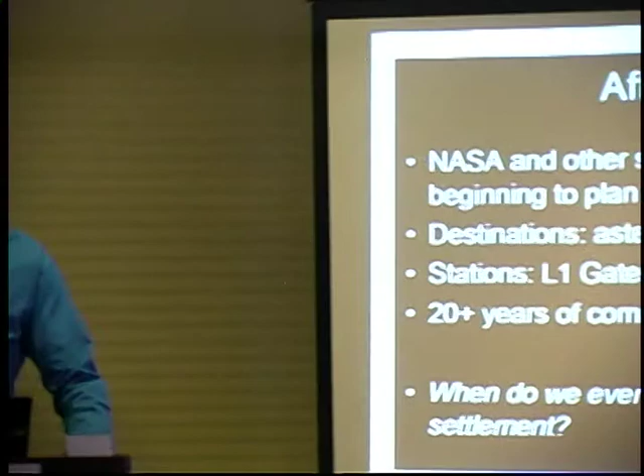I'm John Cserep, here to present a concept for a near-term colony demonstrator, as I call it. NASA's getting to the point where it's starting to think about what to do after ISS, and a number of ideas have been floated. They are still kind of groping for ideas, not sure where they want to go next in terms of destinations. They are talking about putting some kind of station at L1, such as one sometimes called a gateway. Whatever they commit to, it's likely that they're going to be doing it for a long time to come. And at some point, we've been asking, when do we ever get our turn to get some progress towards our goals of making a spacefaring civilization?

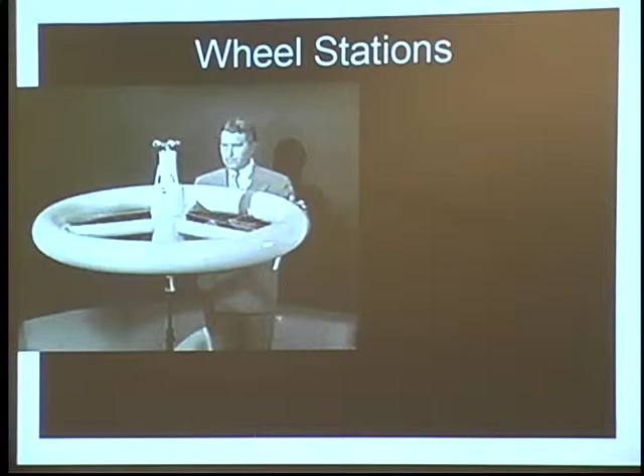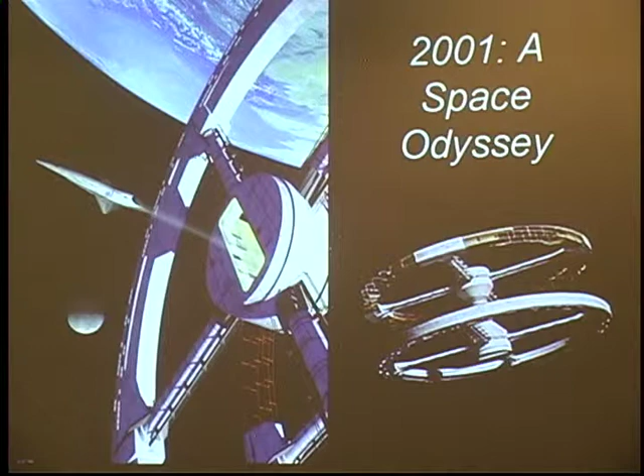An idea from the 50s and 60s is something I'd like to talk to you about today. The idea of a wheel-type station which generates its own gravity by centrifugal force was pretty popular for a time, and fell by the wayside in the 50s and 60s, mostly for, I'd say, relatively valid reasons, but I'm going to propose resurrecting this idea. I think the time has come to come back to this and make such a station, but for completely different reasons than were originally envisioned in the 50s and 60s.

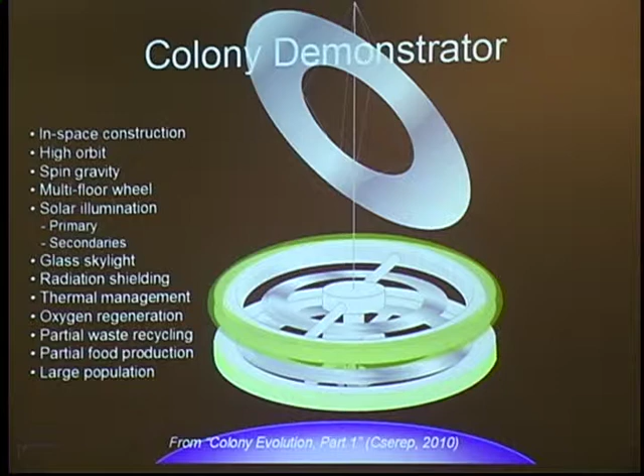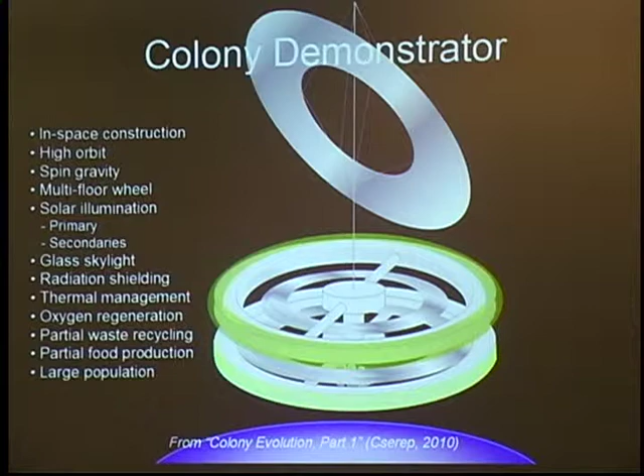So in a previous talk to ISDC, I identified the need for what I call a colony demonstrator, which would be a LEO station of reasonable size, but which would include the key features of a full-sized colony. And since then, I've been thinking about the even harder problem of how to actually get such a thing paid for. Even at this scale, it would be quite expensive, and none of us have any money to spend on such things, so how to get it built has been what I've been looking at since then, and it's become a very, very interesting exercise that resulted in what you're going to see today.

So my way of looking at this is that if we want to get some kind of demonstrator built, it has to appeal to the people who have the money but who may not actually care about our goals. So the solution, as I see it, is to make a station that serves as many customers as possible while still meeting our needs for advancing the key technologies. So, based on things I've heard at these conferences over the years, I identified 4 key groups of people who might have money that could be leveraged for this purpose.

And they are in order: those interested in propellant depots, which you've heard about at this conference. There's a growing interest in putting these, which are basically rocket fuel gas stations, out in orbit or out near the moon to act as enablers for a wide variety of other missions. Usually these are conceived as strictly single-purpose facilities, but I'm going to propose that they be thought of as more like just the nucleus of what could grow to become a much larger and substantial facility, as I'll show you.

Second group, those interested in space hotels. You're aware there are a number of companies working now to bring paying passengers into space. They all intend eventually to take passengers into orbit, or they want to have a destination to take them to. Right now they have some very notional idea about what such a hotel might be like. I'm going to suggest that what they think they need is not what they really need, and what they actually need is something a lot more like what we need, as I will explain.

Third group are those interested in going back to the moon in any serious way, especially if it involves people. They could benefit greatly from what I'm just broadly calling risk reduction, which is a deliberately broad term covering both people and their equipment, and it would also involve a great amount of cost reduction, as I'll show. And the fourth group would be those interested in going to Mars, who would benefit in all the same ways for the same reasons. And of course there's some overlap between these two groups, but maybe not as much as most people would guess. The bad news is, of all the people interested in spending money on any of these things, none of them is the least bit interested in the kind of station I'm going to propose.

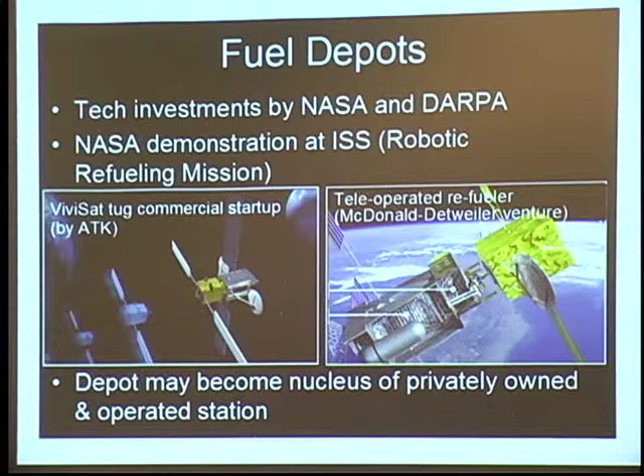And this raises the very intriguing possibility that any space station built around such a depot would be a commercially run outfit, meaning that agencies such as NASA would be simply tenants who would just lease space aboard the station as needed.

Okay, space hotels. So these companies are wanting to take people to space. When all this activity began over a decade ago, there was some very vague discussion of what space hotels might be like. If you ask them today, they would probably say that they intend for it to be something like a number of Bigelow inflatable modules connected together in a zero-G station, which would seem to meet the two key things that their customer is going to want from a space visit. One is to enjoy weightlessness, the other for Earth gazing.

However, I think they're overlooking the fact that you need gravity to be provided for at least 2 major reasons. One is using the toilet. And if you know anything about how astronauts deal with that in zero-G, you know there's really nothing good about it. And it's one thing to ask a NASA employee to put up with that kind of thing, but for guests paying a whole lot of money for a space vacation, no. Not only no, but hell no. I'm just going to leave it at that.

The other main thing you need gravity for is eating. And of course, you can eat without gravity. I'm sure we've all seen videos of astronauts floating around, eating M&Ms and little blobs of water in midair aboard stations, but only up to a limited point is that going to be acceptable. When people are spending that much money, spending several days in space, that's a lot of meals to be served, a lot of food floating around, sticking to walls, getting into things. That's really not going to be acceptable.

But this seems to present the space hotel designer with a dilemma. How do you provide both gravity and no gravity in the same facility? But we've already seen the answer, because we all know that a wheel type station has a hub, and the hub is an opportunity to provide a zero-G environment. So in principle, at least, you can sort of have your cake and eat it too, and I'll try to show you how we might do that.

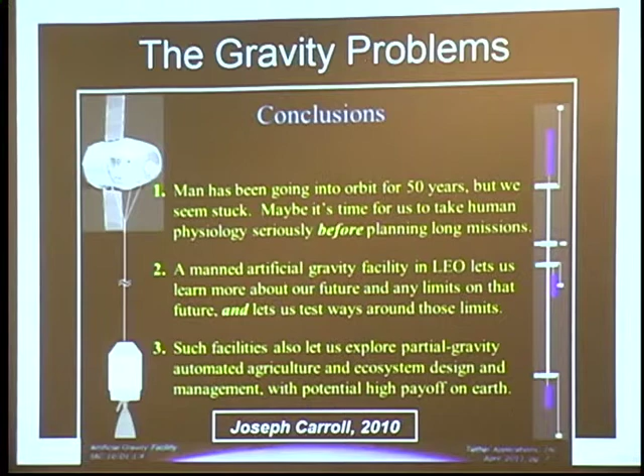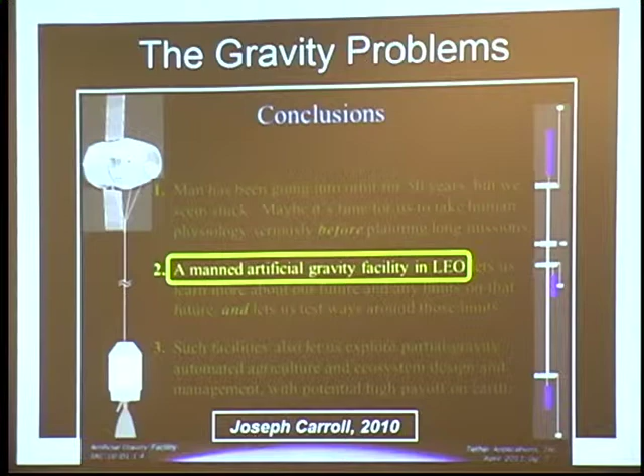So both the Moon and Mars present gravity problems basically involving people and their stuff. We don't know how either one really works over long periods in these lower gravity environments. To try to address this before making the big commitment to a moon base or a Mars mission, it's been proposed in the past that some kind of spin gravity facility in LEO could be the answer. For instance, at this conference a few years ago, Joseph Carroll proposed what he called an artificial gravity facility in LEO, which in his case would consist of a couple of modules connected by tether, and then they would tumble end over end to provide whatever level of gravity you like.

Also, the Space Studies Institute has been focusing lately on what they call a G-Lab. The idea here is a little different. They would include little centrifuges in this station, only little ones though, only able to accommodate lab rats or guinea pigs. Neither one of these concepts seems to have really gotten any traction, and I can well imagine why. They're both dedicated facilities that seem to serve only this one purpose. And I think they have generally the right idea. I think we just need to capture these features in a more versatile station, which can also accommodate a number of other customers with other needs.

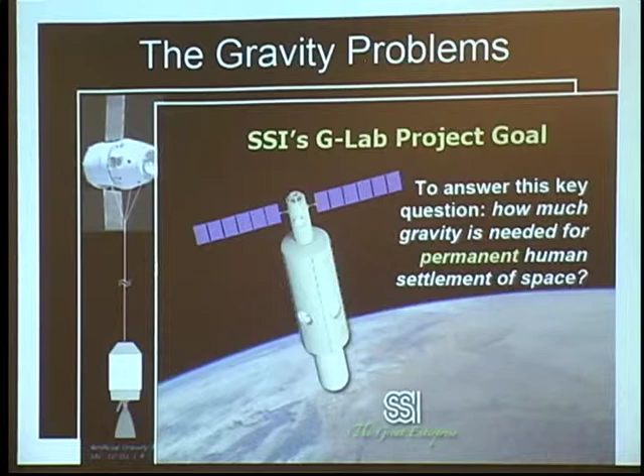So in the case of the Lunar Proving Ground, as I call it, this is where we could have the chance to see what the effects are of low G on the human body.

And it may not be obvious that this is actually a big cost driver, because determining what the tour of duty is that people can serve on the moon determines how quickly or how frequently you have to rotate the crews back to Earth, which is one of the main expenses of running the base. So until you know how long you can leave them there, you can't say how expensive it will be to operate the base. And so why would anyone commit to a moon base if you can't tell them how much it's going to cost to operate it?

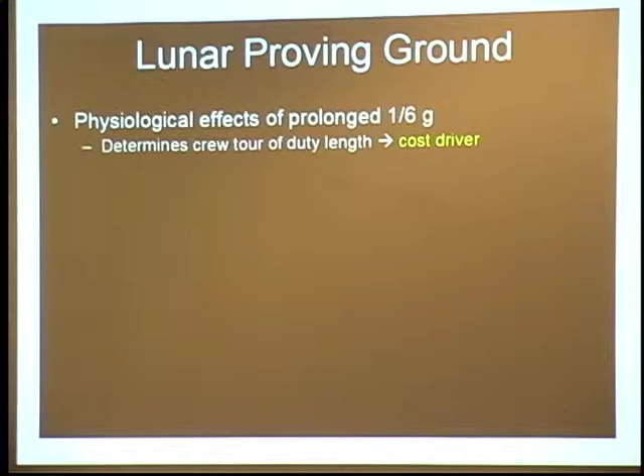As for the equipment, we can test such things under the exact lunar conditions, thereby reducing risks before we do the real thing, and mature what NASA calls technology readiness levels. TRLs are all about environment, and there's simply no way to reproduce the lunar environment on Earth. We can have vacuum chambers, but we can't do anything about the gravity.

And so here's the opportunity to reduce those risks and affect the whole way that we design our equipment as well. We can test equipment before it goes to the moon, making a standard thing that any equipment bound for the moon first stops at the LEO station, goes through checkout before proceeding. So that reduces our risk greatly there.

But it also reduces the engineering costs of developing the equipment in the first place, because if you know that the equipment is going to stop there first and be checked out by someone, then you don't have to try to design in super duper reliable systems with all their redundancy and exotic materials and so forth. Those are the big cost drivers. You frankly can kind of relax and have something more reasonable that has more reasonable cost.

You can probably all think of a lot of space missions that have failed or been compromised in the past because of some stupid little thing that went wrong. A little latch that didn't work, a spring, a switch didn't work, or something didn't want to unfold correctly. A lot of missions that would have been saved if there simply had been somebody on the scene who could have, frankly, given the thing a swift kick to allow it to proceed. Well, in this case, we'll have that person there, and knowing that you're going to have that person there means you don't have to try to make the thing super reliable.

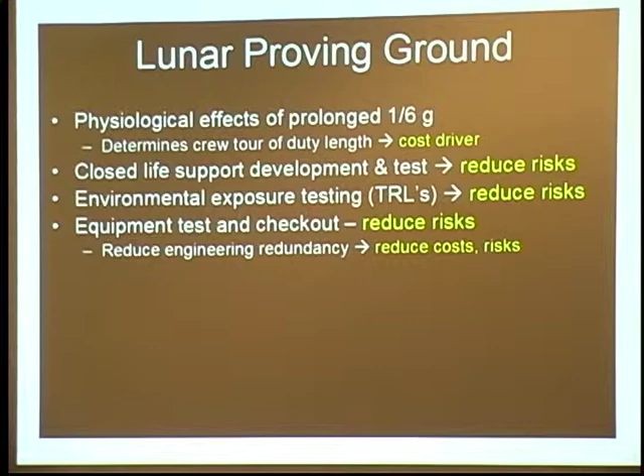So, now, I'll do you one better. If you know that a person's going to be there to help with it, then maybe you don't have to design it to try to do so much for itself in the first place. Maybe it doesn't have to try to unfold its own antennas and solar arrays. Since that's a one-time operation, why not just have the station crew do that for it? Now you don't even have to design in the actuators, the springs, the motors, and so forth. So how much more did you just save there on your upfront costs and your operations cost?

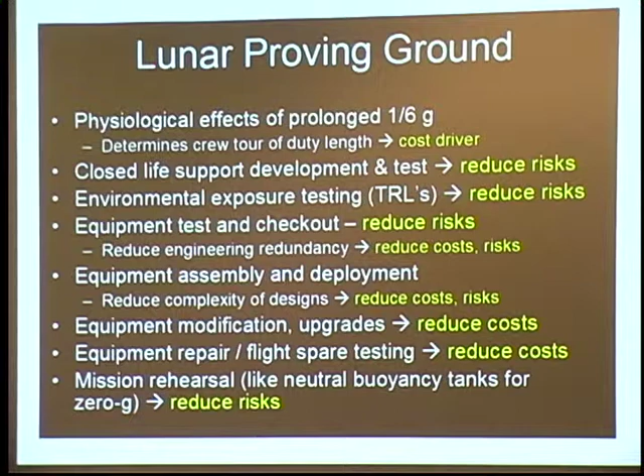And I can go further. In the interest of time, I'm not going to speak to all of these, but there are just a whole host of ways to reduce both the costs and the risks of equipment going to the moon. And this should result in a dramatic reduction in the cost of the lunar operations. This is how you make moon operations affordable.

When it comes to Mars, all the same things apply for all the same reasons. In fact, they probably apply, in a sense, even more because it costs more to go to Mars, and therefore there's more at stake. Or as someone put it to me, the price of failure is even higher. And therefore the risk tolerance is probably lower. So all that stuff I just said about the moon probably kind of goes double for Mars.

Mars also has the unique need to take care of return samples. We want to bring back samples from Mars, and there's a chance that they might have microbial life in them, not just fossil life, but maybe living life. And nobody wants to risk back contaminating the Earth, and so the idea has been that we'll just bring them back as far as the International Space Station, use that as an isolation lab, and just study them there.

Well, that idea seems to be increasingly implausible. The station's getting pretty old, and at the rate we're going, by the time we ever get some doggone samples back from Mars, it's unlikely the station is still going to be available to be used.

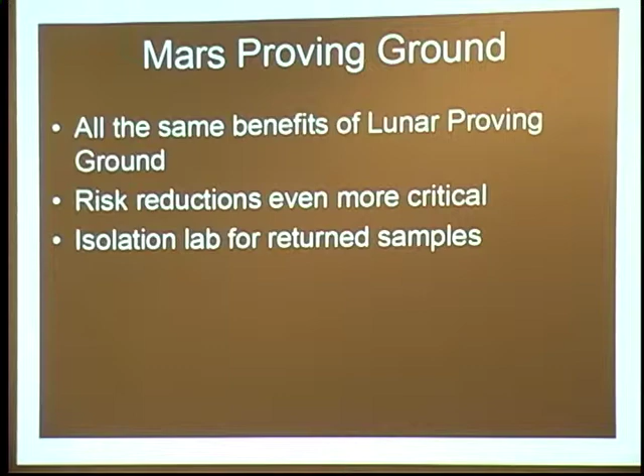And even if it is, it's really not all that great an environment for studying such samples. If you think about it, zero-G environment to study soil and dust and that kind of thing, really? I mean, if it's all we have, I guess we'll make do, but surely we would prefer to have a much more suitable type of station before bringing back such samples.

And also, I'm going to assume that we would get serious about sending people to the moon, or back to the moon, before we go on to Mars. And the concept you're going to see evolves in a way that reflects that assumption. So, if you gather together all those requirements from the previous slides, it adds up to this whole boatload of requirements. And the most important one, however, is this last one.

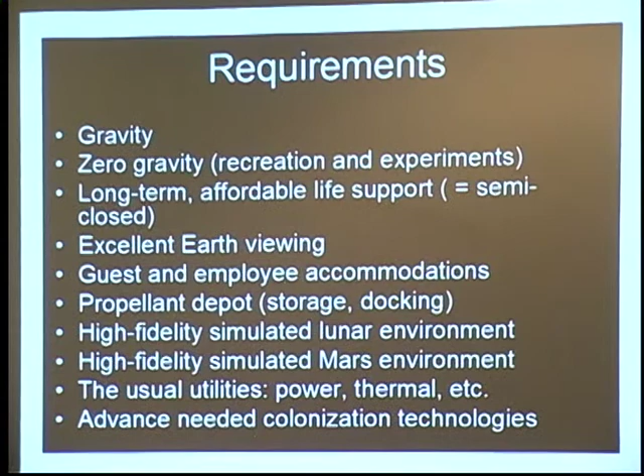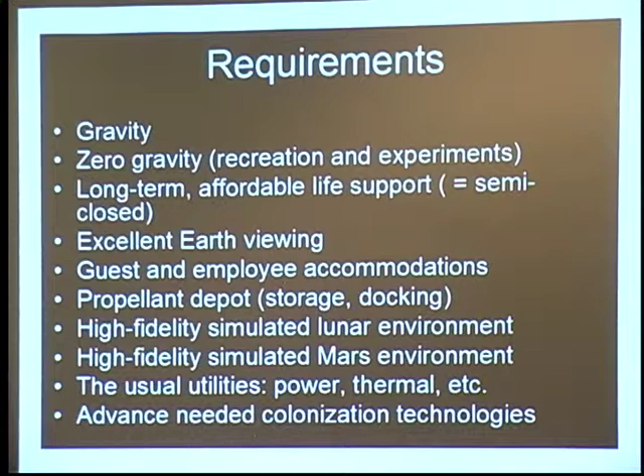This is about reducing the risk for our long-term goals. That's the only thing that really matters to me. I'm going to keep my eye on that ball. All the other things are not really the reasons to make this station. They're more like the excuses, just the ways to get it funded. But that last one is the one I'm really after. Okay, then let's plunge right into it. Then let's start with creating it.

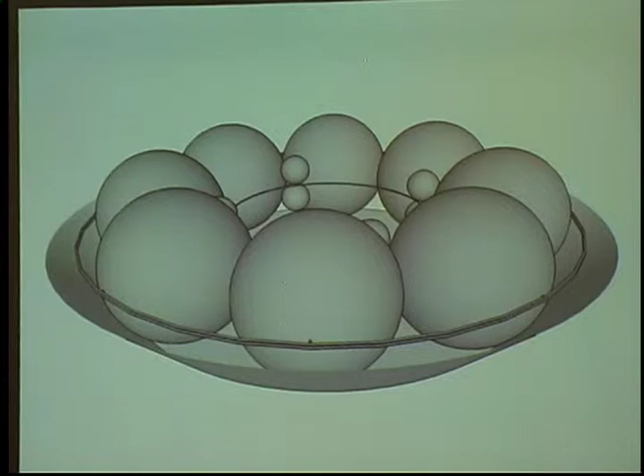The fuel depot. There are a number of configurations of these things which have been proposed, some of which are spinning facilities. And since we know that's where we're ultimately headed, let's start with one in that kind of configuration. And I'm going to suggest notionally some spherical tanks arranged in a ring type configuration and shrouded by a mirrored housing to keep the sunlight off of them.

And you see right here one of the limitations of the software that I use. It's Google's SketchUp software I use to make these. And it doesn't do true ray tracing, and so as a result, I can't show reflections in the mirrors. So you do have to use a little bit of imagination as you view these.

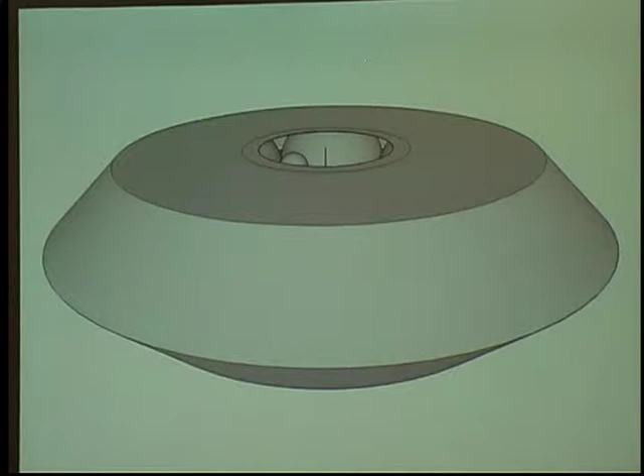So even here, we're already starting to do some risk reduction for the colonies because this kind of funny shaped mirror, which is called a frustum shape, is a feature of most space colony designs I think I've ever seen. And it's kind of an awkward shape to build in space, and so if it turns out to be tricky, here's our chance to find that out and learn how to deal with it.

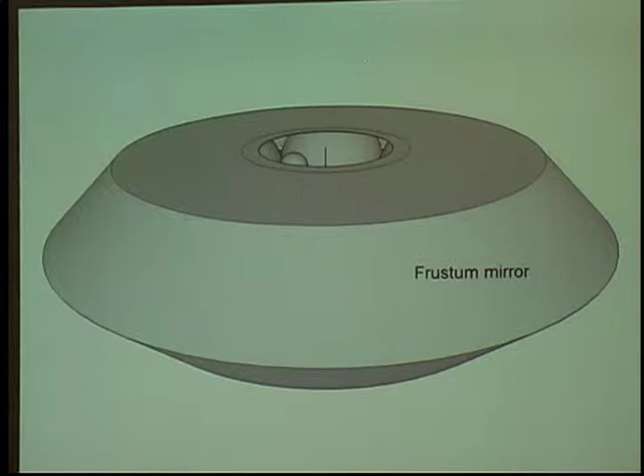Now the tanks can be spinning, but the spacecraft which dock to it obviously need a stationary point. So there's where you have the hub of the wheel, and up top is where they would dock. And in between, you have this little connection point, what I call the spin interface, which is something usually taken for granted in wheel-type concepts, many of which have a similar arrangement. There's not usually much detail about this, and I'm a little concerned about it. It's not going to be trivial, although I haven't identified any showstoppers.

However, I'm just concerned enough about it that I don't want any more than necessary, so I'm going to have just one in the whole station. So from this point on, anything that wants to be part of the stationary part of the station will have to be added above that. Everything below it will be rotating.

Now, there's more opportunities for risk reduction even at this early point, because one of the things identified back in the day in the 50s and 60s was that when you have a wheel station and people and equipment move around it, the center of gravity is going to shift, and it could result in a wobbling kind of motion, which would probably be bad. Their proposed solution back then was to use a series of ballast tanks around the wheel, which would have water in them, and the idea would be that you could pump water from one tank to another in order to redistribute the weight as needed.

Well, what have we got here? We've got a series of tanks that hold liquid fuel in a ring, and we can practice doing exactly the same thing to show that we can keep this thing balanced as the mass changes, as the fuel comes and goes. And also it might be what I call spin balancing.

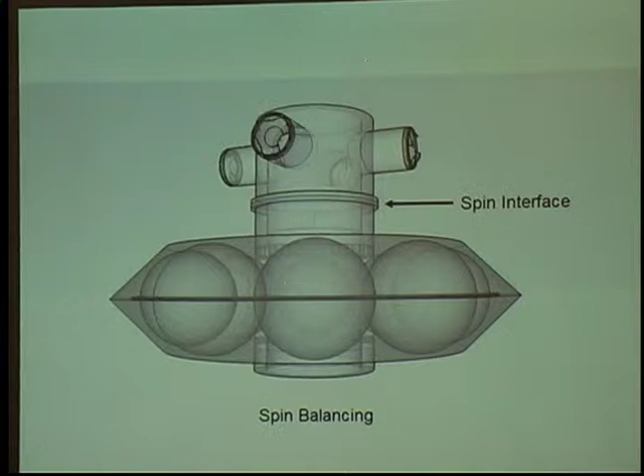Let's see. And so it looks something like this. I also want to point out a number of these objects that you're going to see I did not create myself. The spacecraft you see here, I got from an online database. Users of this software can create something, upload it, and make it available to others to download for free. That's where I got these spacecraft and a number of space station modules you're going to see, the rovers and the landers, the people and the astronauts, and most of the furnishings in the station. So I don't want to take credit for other people's work.

Okay, well, the zero-G lab, as I mentioned before, it's important to understand that if you commit to a ring-type station, it doesn't mean that you forego the opportunity to do zero-G research, because in principle you can do that in the hub. And so rather than include such a thing, I started thinking about what a lab might need to be, and it doesn't particularly advance our goals, however, so I wasn't all that enthusiastic about making some kind of laboratory that I frankly don't really care about.

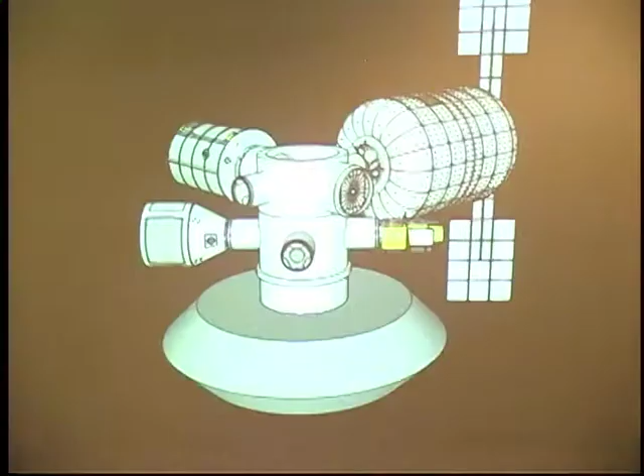So my conclusion was that we actually don't need to make a lab of our own. All we really need to do is provide a place where other people can bring their labs of the kind that they've already built for the ISS, or the kind we expect to have in the future, like the inflatables, and simply give them a place to hook up to this station, meaning that all we have to add is this little piece here. And then they can come and go over the years as they like.

Okay, so the next piece. This is where the guests of the hotel would be able to enjoy zero-G along with Earth viewing at the same time. So the stateroom tower is the next piece, which gets added obviously on the hub. So this is what I came up with. This is a way where you see the outer wall is completely transparent. So that's a thick plexiglass wall, thick enough to provide radiation shielding.

And this is one room defined right here. And then another one next to it, and third one beside it, and then three more on another level below them. There's an interconnecting corridor, as you see. And so that gives you 6 rooms altogether. Figure 2 people per room on average, about 12 residents at the hotel at a time. That seemed about right for a first generation hotel. I don't really know how to furnish a zero-G room, so I just threw in a queen size bed there in one of them so you can get an idea of the size of it.

Another thing about the Earth viewing business is that it's all very good as long as you have the Earth in front of you, but at other times you might have the sun in front of you, and that very bright sun streaming through those big windows I think would not be enjoyed by the guests, especially if they're trying to sleep. So my conclusion is that hotel rooms are going to have to be kept facing away from the sun, always, which means that the hub is not only not rotating, but it's also being kept in a fixed orientation with respect to the sun at all times.

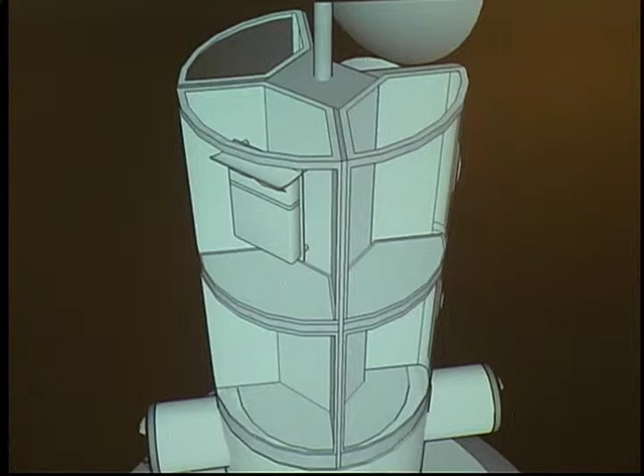As a result, because these rooms are facing away from the sun, then the backside is facing into the sun all the time, and so that seemed like the logical place to put the solar collectors. And so this is a notional depiction of a solar dynamic power generation system, where those are parabolic mirrors, also called a solar thermal system. This is lacking some components. I'm still learning about what these include.

Most notably, I'm missing the radiators. I just didn't feel like I knew enough about them to even guess how big they would need to be or in what configuration. If any of you have a suggestion you'd like to offer, I'd be happy to add them. For now, I'm just going to acknowledge that they're missing. And so it looks something like this.

Okay, time to get serious about building the wheel itself. So the next launch brings up an extension of the hub on the bottom there, and packed inside would be all the piece parts you need to build out the spokes, along with at least a couple of robots to do the construction. I say robots, they would probably actually be teleoperated.

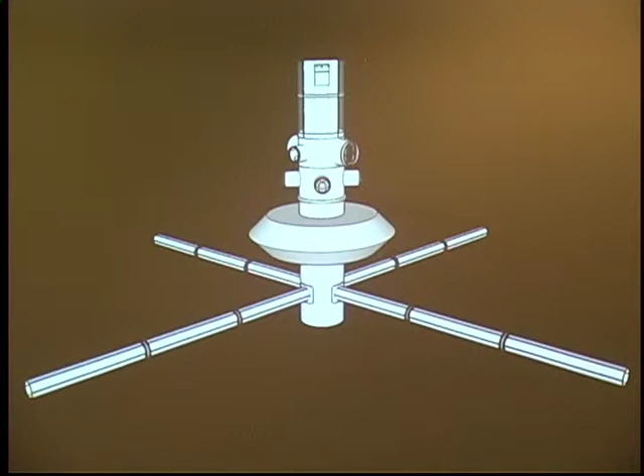And I don't know too much about the specifics of them, but I'm getting the feeling that they might be about the size and dexterity of the robots from the movie Silent Running, if you recall Huey, Dewey, and Louie. Imagine something about like that, but with the ability to operate in zero-G also.

Okay, but what about building the wheel itself? Now this becomes interesting. I looked at every wheel concept I could find, both the serious proposals and the science fictional ones, and very few of them really talk about how to actually get the wheel built. And all of those that did, I didn't really like anything that I found.

And I'm also familiar, as I'm sure you are, with the idea of making a wheel out of a series of cylinders linked end to end, kind of like linked sausages, that allows you to set up these prefabricated sections and make it as easy as possible. But nobody thinks we're ever going to build a city in space with that kind of approach. Little prefab modules. We're surely going to need to do true construction to make a city.

And I would submit that we've never done real construction in space up to this point. I contend that we've only done mere assembly of things. Like when we envisioned our International Space Station, we kind of broke it down into the biggest pieces we could that would still fit within the space shuttle cargo bay.

And we worked on them down here on Earth, a lot of years, put a lot of effort into them. And then when we got them into space, we wanted to do as little additional work as possible to get them into position and just hook up a few connectors and call it good. Well, that's just about the opposite of real construction.

Down here on Earth, we use extremely simple building blocks. We use a whole bunch of them, and we put them together in very complex ways. If we're ever going to have a city in space, we're surely going to have to do something a lot more like that. And since the purpose of this station is to demonstrate things and reduce risks, now's the opportunity to begin learning to do that.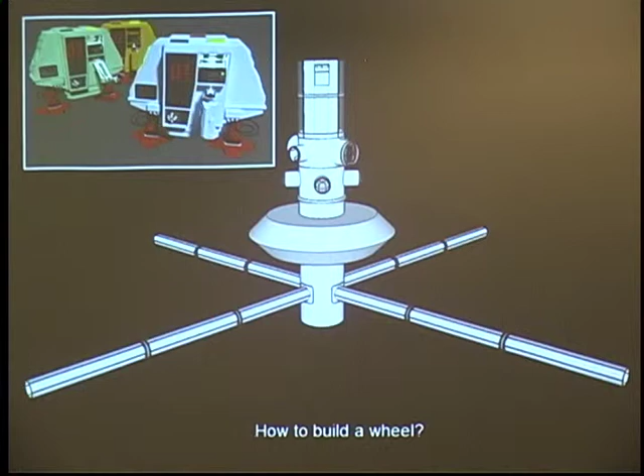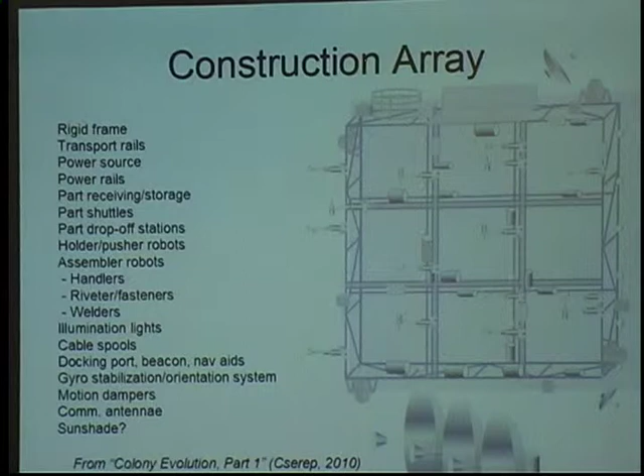And to do that, in a previous talk, I proposed something very notional, a construction array populated with a number of subsystems I won't discuss here in detail, but the key thing is that it reflects the size and shape of the thing you want it to build, and it's populated with a lot of little robots.

These are nothing like the robots we have in space today. These are very simple robots like you might find in a factory, and they would do simple tasks in a very repetitive way. So some of them might simply hold the piece parts in place, some would kind of weld them together, others might just shuttle them around on the array.

And they're also attached to this little mobility track which allows them to roll around and move without having to float off into space. My philosophy is that nothing ever goes floating during the construction process. Everything is always held securely by something else.

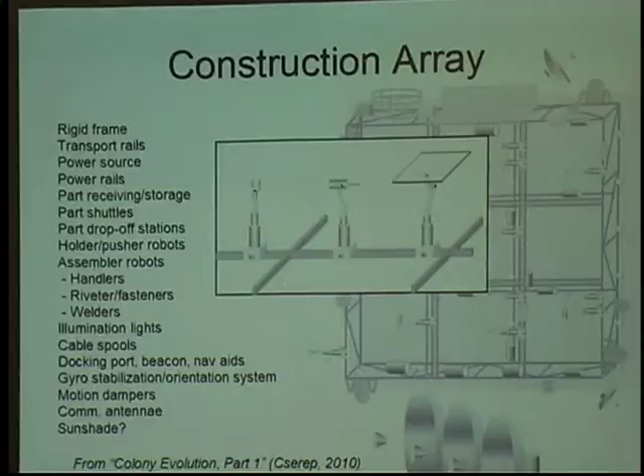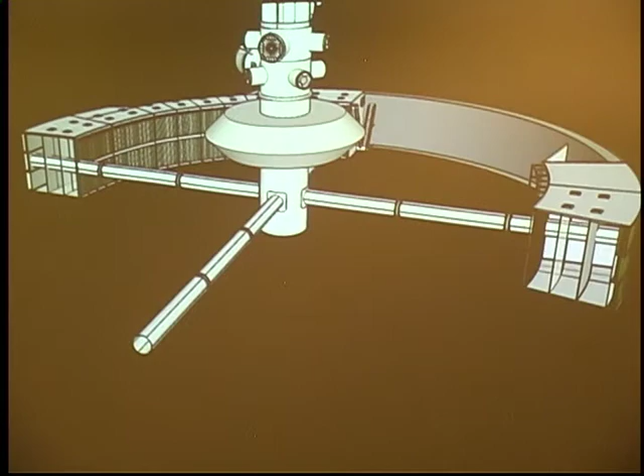And I haven't attempted to model this whole system in 3D, but imagine that something like this is brought up on the next launch and moved out to the end of one of the spokes, and then you start feeding it piece parts, and it starts building the wheel in cross-section as you see here. And once the wheel's spinning, down is going to be basically outward, so you understand why the decks are oriented the way they are. So that's the lower deck, the mid deck, and the upper deck toward the center. And it continues in that fashion, building the wheel until you have it completed like this.

Now the green stuff you see in the foreground is algae and water behind some transparent panels facing outward towards the sun, and its job is to be part of the closed life support system to refresh the air through photosynthesis, much as we do here on Earth. This is another idea that I've read many times, but I've never once seen anyone depict how to actually incorporate such a feature into a wheel station.

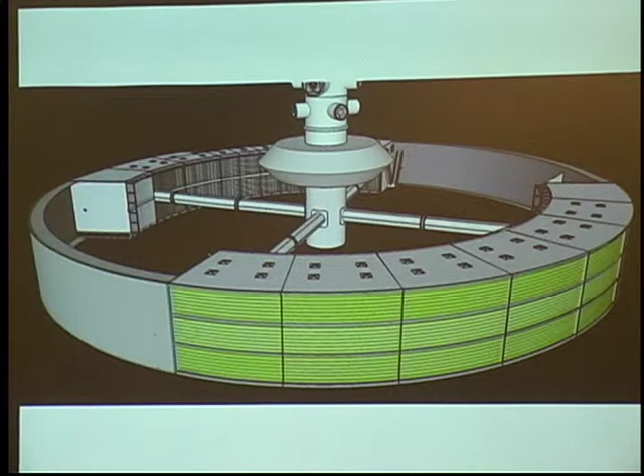And I think we do this too often. I want to tell people, I think we take things for granted too much. It's a little too easy to say, well, we'll solve this problem with this solution and that problem with that solution. Until you try to combine these things into a complete system, you really have no idea what ideas will really work. Because it's only when you try to bring them together that you start noticing where things get in each other's way. And then you start having to make trade-offs, and that forces you to decide what your priorities are. And in the end, you can't use the ideal solution to every problem. They just don't work together.

But if you can massage the systems and bring them together into a complete integrated concept, you wind up with something I think is a lot more credible and a lot more useful to our community. I wouldn't claim to have completely achieved that yet, but I'm trying to at least take a stab at it in hopes of showing the value of doing so and inspiring others to do more of the same. In fact, I would say that's one of the main benefits I got out of this whole exercise. I just feel like I understand space wheel stations a lot better now, because there are a lot of things along the way I just had to discover for myself. But anyway, back to the wheel.

On the left there you see a part of the wheel where you can tell there's a floor, but there are no walls or ceiling enclosing it. This is the proving ground area. Equipment to be tested gets placed there. The whole wheel spins to provide lunar gravity, and obviously it's exposed to the vacuum the whole time. And using a series of mirrors, we can also subject it to full solar loading, together creating an extremely high fidelity simulated lunar environment, totally impossible to make on Earth, and able to accommodate large equipment for extended periods.

On the other side of the wheel, you see another one just like it, for reasons of balance. And so I call these the outdoor areas, and the rest is the indoor areas. And in between are a couple of hangars, which are like big garage airlocks, where you can take the equipment being tested, wheel it in there, seal it up, pressurize it, and then the crew can work on the equipment in a shirt sleeve environment to make any modifications necessary. And then when they're done, they wheel it back out to resume testing.

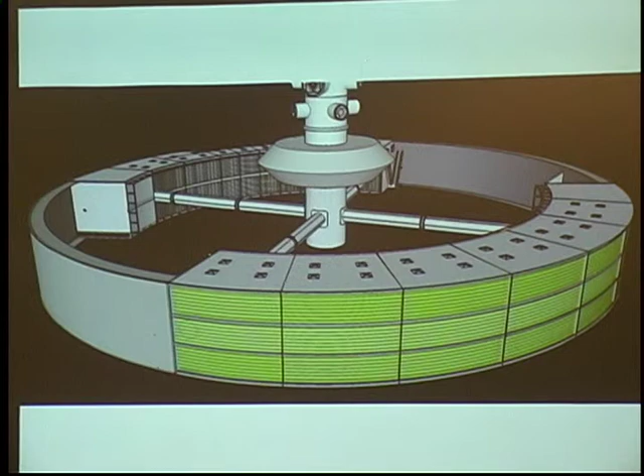More about that shortly. As for the mirrors, you have to make some assumptions about how the thing is oriented with respect to the sun. So here I'm assuming that the spin axis is vertical and the edge is toward the sun and the Earth, as you see here.

And in that orientation, to get sunlight to the station, or here if we're looking at a cross section down here, you can see the algae panels on the outside face toward the sun from left here. And so they can receive sunlight directly, but everything else has to receive it indirectly. And that's done with a couple of mirrors working in conjunction.

One is a big annular shaped mirror placed above the spin axis of the station at a 45-degree angle, as you see here. And it works in conjunction with a second set of mirrors down here, also set at 45 degrees. And they go all the way around the inside of the station and therefore form that frustum shape that I referred to earlier. And the idea is that the two work in conjunction.

Sunlight coming from the left bounces off one, then the other, and into the inner rim of the wheel. And it does that all the way around. And so the inner wheel, or the inner rim, would be transparent, acting as a skylight to allow that sunlight into the upper deck. And so that's where we would grow the food. That's another part of the life support.

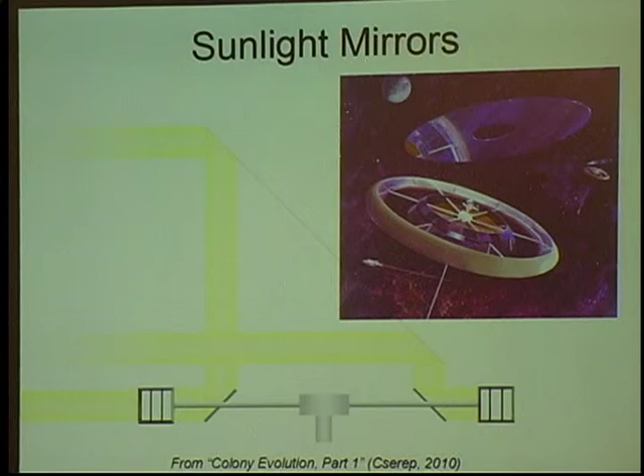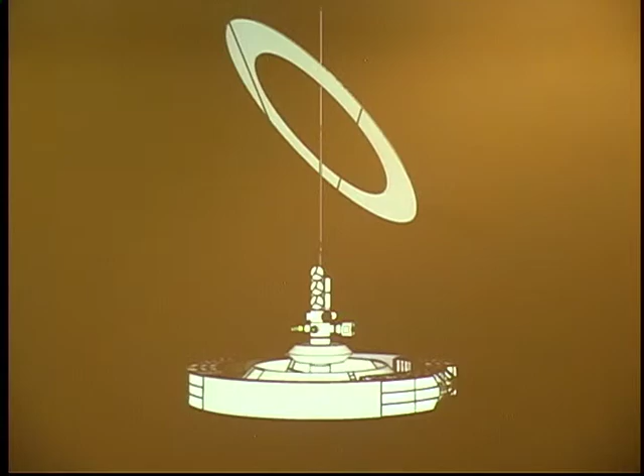This is basically the same configuration as NASA's own space colony concept from the 70s. You see with the upper mirror, the lower mirrors, and the skylight on the inner rim. So here's our lower mirror, and it looks like that. And the upper mirror is put on a mast to make sure it stays in place. You can see it more clearly here. And I've also got some cables on there to allow you to adjust the tilt if needed.

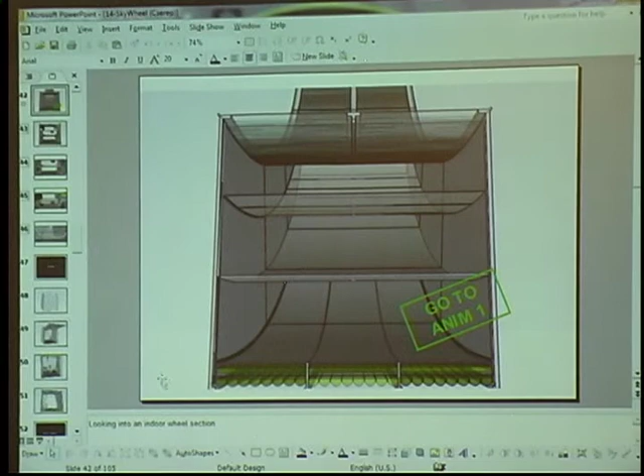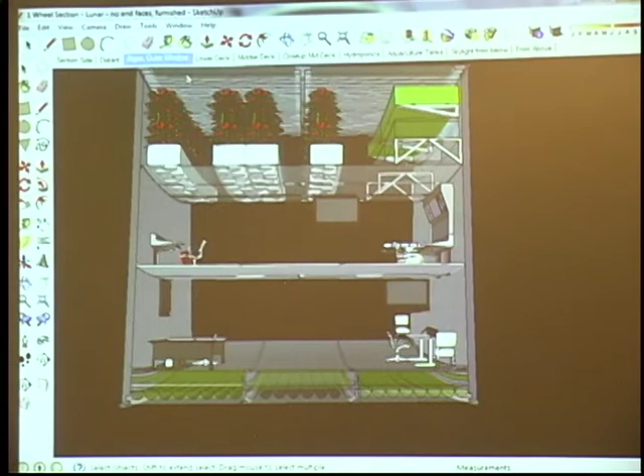Here we're looking at a section of 15 degrees of the indoor arc, starting with the outer panels where the algae is, which is where the air gets blown through and refreshed. I have more details about this than I'm going to discuss today in the interest of time, but if you have an interest, I can tell you more about it later.

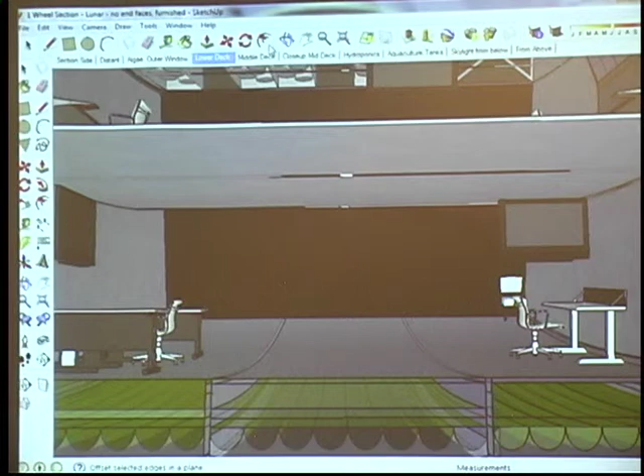The lower deck, I threw some furniture in here just to give you an idea of the scale. I haven't attempted to outfit the entire interior, mind you. And in particular, this is missing the ladders and stairs, which you would also have for moving between decks.

And middle deck, much like first, and then probably the most interesting deck, upstairs, where the food is grown under the skylight. I was only able to find one kind of plant to use here, but imagine a variety of crops are being grown here hydroponically under the skylight. And in addition to providing food, they're also helping to refresh the air.

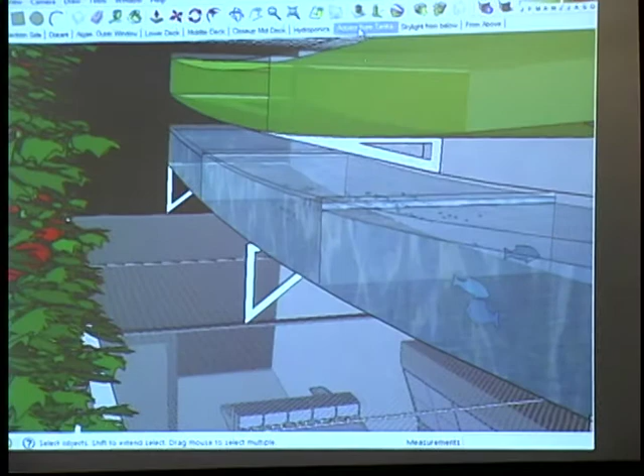I wanted the crew to have more than just a vegetarian diet, however, and as others have suggested, I've concluded that the best way to introduce other kinds of foods would actually be with aquatic species. And so on the other side of the deck, I've got a representation of my aquaculture system with a series of interconnected tanks, which are meant to represent a complete aquatic food chain of either freshwater or marine species.

And the idea is that starting with the algae growing under the skylight, basically little things get fed to bigger things and bigger, until you wind up with something in this last tank, which is edible to the crew. After it's harvested, the leftovers and other wastes are recycled. They're sterilized, broken down, and sent back into the system as nutrients to support the growth of more algae. And you do something similar on the other side with the plants.

I don't expect that this is actually going to provide all the food the crew needs by any means, especially not at first. We frankly don't know how any of these species are really going to do under lower gravity conditions, and this is our opportunity to find out. So that's the main value here, at least for the first year or two.